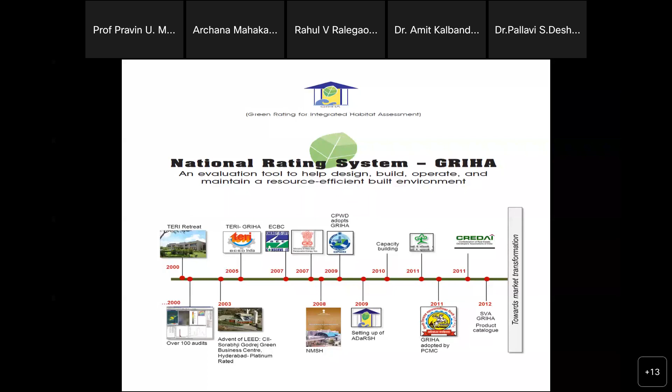So ultimately, every client or every end user wants some kind of ratings or certification for the projects which you file with any of these agencies I mentioned earlier. So when I talk about GRIHA, you have star ratings, like the way you have for air conditioners, refrigeration units, and so on. So you have a multiple star rating system, and as when we write an exam, it is very similar. You have to get the threshold values.

The threshold values are shown in front of you, starting from around 40%, like the passing marks we all understand, from where the journey of fetching the certification starts, right? And then there are ranges: first class, second class, and then distinction, the way we understand, right? So these are the standard guidelines they talk about. And you can see there are various aspects; on the left-hand side, in the section where I'm moving my cursor, these are the criteria, right?

So as environmentalists, I hope you understand the concept of water conservation and waste management, right? However, equivalently, energy also has a direct implication for society. Then you talk about site planning. So these are all various aspects. Some aspects can be in the basket of environmentalists, and a few points may be from a civil engineering perspective. So I will only try to project what is related to environmentalists, right? And then we can take things further.

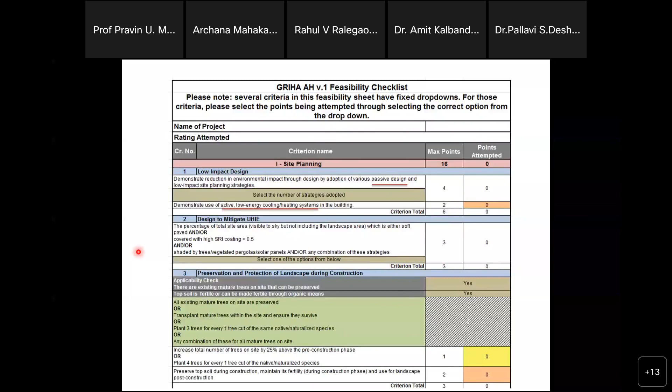It talks about rated capacity of the renewable energy system installed on site conforms to the installation of 1 kilowatt of power per 500 square meter of total built up area as a threshold. Now this itself is a challenge, right? Now there are a lot of aspects, but as a common man, if I want to tell you, this is a concept where fundamentally it is the decentralized approach wherein you meet your resources by your own means, right? So this is the initial investment.

Now again, when you talk about renewable energy, probably we need to understand the baseline: how much energy is required in a building. So as an energy auditor, if we want to work or understand, we need to first evolve with a concept of how much is the total billing, how much energy I exploit to meet all the demands in the premise, say from the perspective of the entire institute, right? Later you can think about how much renewable energy.

So as per the green building norms, if you can meet around 30%, right? Around 30% of your energy, if that can be met using renewable energy, you can get these 6 marks. So this is the baseline. So first you have to get your total demand, and then from total demand you have to see, for 30%, how many solar PV panels I can install. So this is one way.

Or you also have bioenergies. There are different ways to meet the energy demand. It's not only solar, there are other means. So when you talk about renewable, in our individual homes, every individual house cannot have biogas, but yes, you can have a number of solar panels which can help to generate electricity either for lighting or for water heating and so on and so forth. So there are standard designs, and we need to look into this.

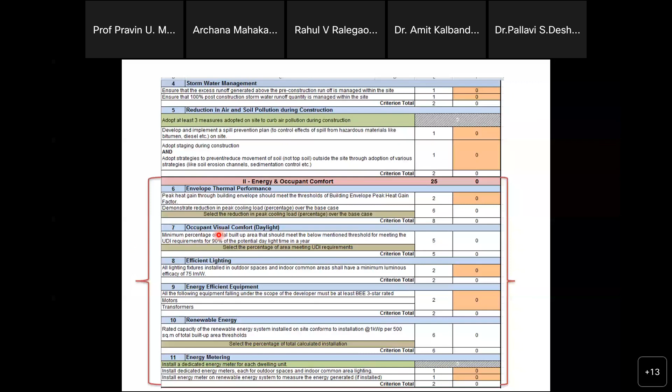There are multiple points. As the time is short, I'll skip this, but these slides I will share with sir, and hopefully he will share them with all the audience, so you can go through them, and you can always put me in the loop if there is anything you are practically trying to get in the project. We will definitely try our best to help you out.

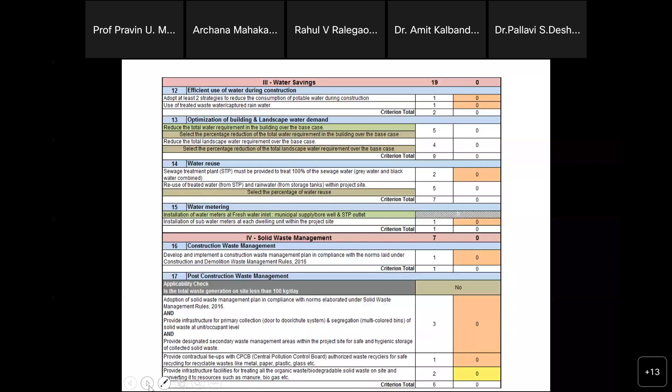So now this is sustainable building material. Probably people must have heard a bit about the various waste we generate. This is something which touches very close to my heart, and I'll be more than happy if anybody has any interest, we can discuss more. But it's typically solid waste management. So we have a huge amount of waste being generated by the communities or the society, and can you use it under the waste to wealth concept, can you generate some kind of resource for the society? So here it is said that almost 40% of your building blocks, right,

they should be from waste. So one kind of waste, most of us must be knowing, is called fly ash, right? But it is not a waste, we call it a byproduct. There is nothing waste on this mother earth, as environmentalists we have to understand. And our job is, can you convert this waste to wealth or byproduct to wealth, right? So fly ash is the byproduct of coal after burning, right? What is left out is only ash, and from that people have started manufacturing fly ash bricks, right? And then why are clay bricks not good?

Somebody may say they are good because they are thermally efficient, but from the environmental perspective, I say they are not good. And now even government has banned. There were certain big articles that none of the red clay bricks should be approved because you exploit top fertile soil, which is not a good sign.

And then for manufacturing it, you need kiln, right? So in kiln, you burn those bricks. So that is also a challenge where you again need energy. So when a product is designed, we call it as embodied energy. How much energy is required to manufacture a product? How much energy is required to transfer the product from manufacturing unit to the site where it is being executed?

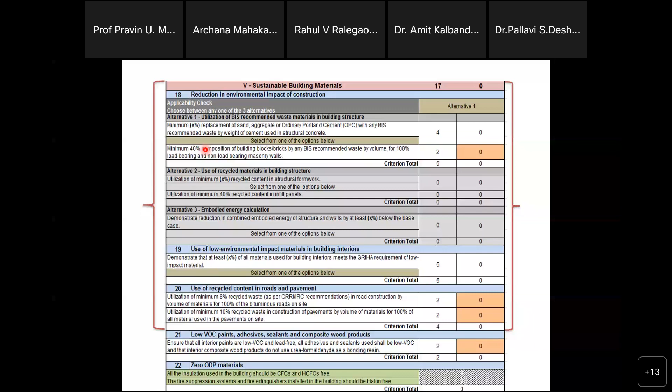As I said, for innovation also, if you feel that there is a novelty, right? Just to give you a practical example, maybe in our childhood, or the guys who are pretty senior will also accept that there was no concept of water filters earlier. Whatever water was coming from the municipal authority, we used to drink. Later on, it has become fashion because all stars, film stars, put something in our mind. Every day on TV or radio you will see advertisements: use Kent RO, somebody says that is the best water.

So what we say is, nobody thinks about how much water you are rejecting. So why green buildings have to be there, why resource conservation has to be there, we need to understand. We need to sensitize the community that whatever we are following is not correct. And when the innovations are there, you need to see that you are not wasting any resource. So we say that sky is the limit for innovation, and as per our need, we keep on modifying our requirements, and then there is improvisation in the technologies, right?

So I can just move further, and what are all the national missions? As the time is short, maybe we can quickly move on.

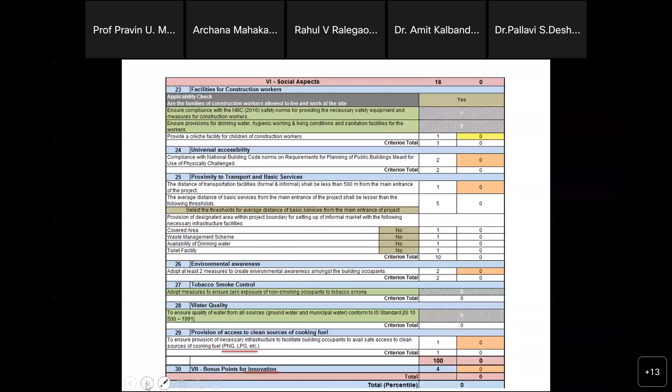For us, this is our bread and butter or the cake. We try to understand what construction materials are for a common man. The majority of people talk in terms of masonry as well as concrete, what we always see in and around us. And for every product there is a binder, we call it cement. And to meet other requirements of the product, there are only two ingredients, fine aggregates or coarse aggregates. Fine aggregates means like sand. Coarse aggregates, you must have seen those black colored aggregates. But can we meet this demand from alternate sources?

So when we started exploring in and around Nagpur, there were huge potential aspects, right? So we talk about utilization of solid waste in our construction industry, from the perspective of industrial waste as well as agricultural waste. And we civil engineers also generate a huge amount of C&D waste. Recently, the last municipal commissioner, when he left Nagpur, said he has initiated this mission for Nagpur, stating that there will be no C&D waste.

And I hope everybody must be reading some newspaper, right? I think today demolition of the flyover in front of the railway station is ongoing. If you get a chance, try to visit and check where that waste is going. It must go to Bhandewadi probably. And then what they are going to do, that also you can check. It is in no way segregated.

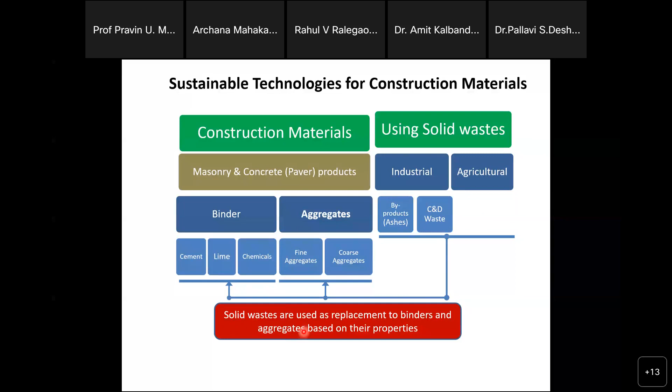And you can see these are the fact sheets from the government perspective, what the government of India has given as inputs. Initially, the majority of our products were all focusing on agricultural waste. We generate a huge amount of waste. Hopefully people are aware that whatever agricultural residue we have, we convert into biobriquettes. So they are the alternate fuels which are being used. And nowadays most of the medium scale and small scale industries are converting their fueling pattern from coal to agro-based products, right? So this is one part.

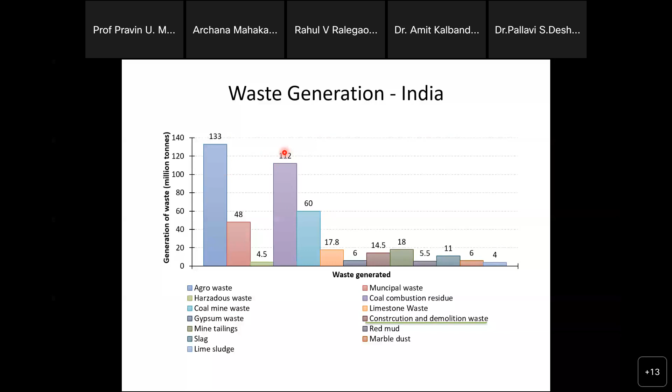Then when you talk about C&D waste, that is also very high in our society. This is a national scenario; I'm not talking about the scenario of Nagpur only. So what we primarily do, and I'm not going to use any technical terms, right? However, I just wish to let you know that we need to understand the feasibility of those kinds of products we have. For that, standard tests are there. We need to characterize those particular products. We need to understand the surface morphology. We need to understand what that product is all about. Does it have heavy metals?

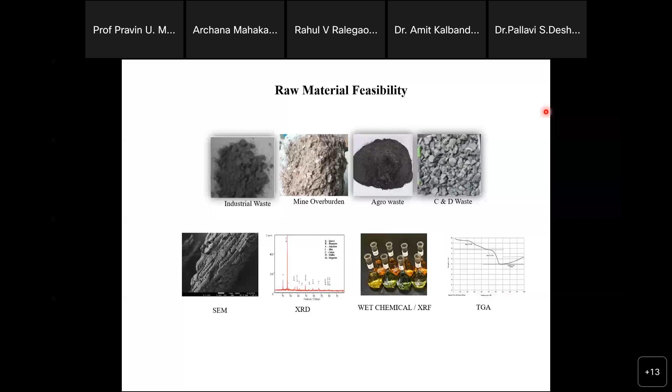So looking at that, how can we facilitate, how can we build this ecosystem of going more into greener constructions, right? When we began 10 years back, there were hardly one or two buildings in Nagpur. You see so much construction activity happening around us. There are only a few structures which are green certified or green rated, in fact. But there are a lot of agencies whom we can sensitize, get associated with and put forward our concerns, and we are by and large connected with most of them, wherein we give our inputs, we try to learn from them or we give them solutions in terms of techno-social challenges we have in society

as far as meeting the green buildings are concerned, wherein the primary focus is conserving resources, that is, the right construction material, then reducing water usage throughout the life cycle of the structure, and then energy. So how can we reduce the load on conventional energy? It's not only putting up solar panels, but how beautifully we design the structure so that the demand itself goes down.

So we could see some C&D waste, and this was one of the examples. I could show you point number 4, which is again available in the public domain. When I talk about Nagpur, the waste generation recorded or given by the government is 1.12 tonnes per day. So it's not a small amount. Now you can see most of the places where redevelopment is happening, where that waste is going; people talk about backfilling, right? However, it has huge potential to be sold back for construction materials, where you can save your soil and natural resources.

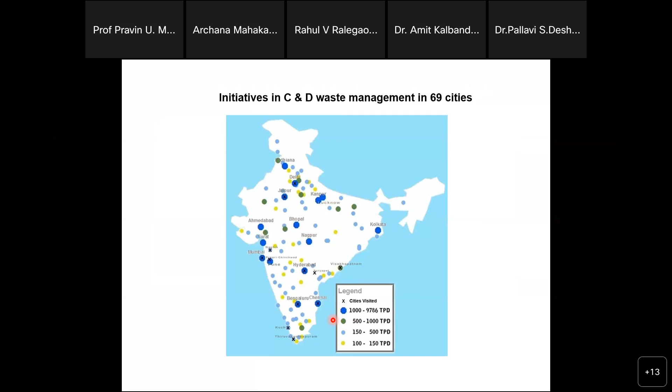So this is how the NMC talks about dumping the waste in the Bhandewadi area, and then again we don't know whether it is being segregated or not. Yes, but I'm talking about standards, right? As a civil engineer or as a material manufacturer, my job is to make sure that these products can go into real life projects. So we say that utilization of waste up to 25% in concrete is permissible, and that is why we started doing this kind of business, manufacturing the products.

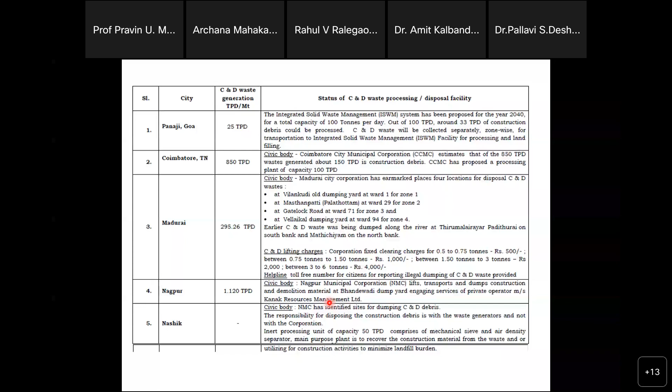And when I am saving 25% of the commercially available product, I also make an end product which is cost effective. That is also one important part, because in India, only things which are cheaper can go into society. Otherwise, it's going to be challenging. There are standard ways, standard methods of meeting this particular demand, and then you have defined ways of doing this business.

I haven't seen any particular operating unit which does this kind of processing, probably not in Nagpur, but if anybody has potential, you can do this business, especially since these kinds of mobile equipment are now available in the market. Even in a place like Delhi, people are doing this business of segregating various materials and selling them back to construction manufacturers.

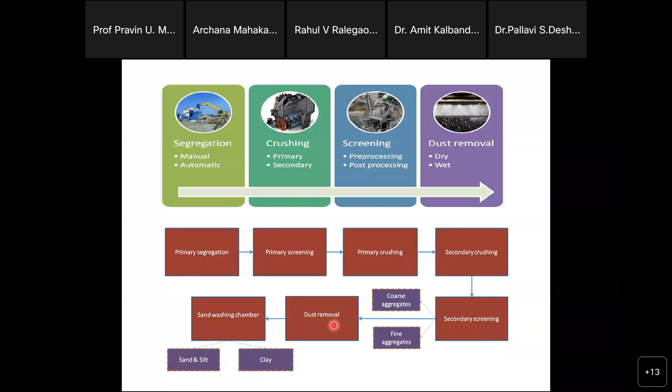If any of you has keen interest, you can visit my lab, maybe on vacation or any holiday, and I can take you. For me, my lab was always the roof, where we have demonstrated all our technologies in small scale models, so that anyone can feel what these products are all about. They're almost 8 to 10 years old now, and all structures are standing very safely and robustly.

Some of the products we have used - I'll just highlight, because we are dealing more with the environment - we have used recycled paper mill waste, C&D waste, sugarcane bagasse ash, biobriquettes, and co-fired bagasse ash. These are some of the products where we have tried using them in these materials.

A lot of products are available in scientific documents and literature. You can refer to them and study a bit further, whether for marketing or learning purposes, anything can help.

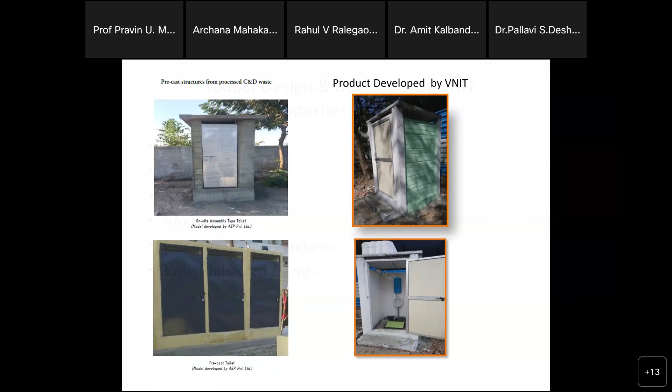So what we are trying to do, as I said, is usage or design of the product - we want to have a sustainable product. When it comes to sustainability, for me, we need to understand that socially something should be acceptable, economically it should be viable, and third, it should not create any adverse impact on the environment. If these three points are met, that becomes a sustainable product for me.

We wanted to design a lightweight product. Probably recently you must have seen that during an earthquake, most people die because a heavy object falls on someone's head, right? So these are some examples.

So having lightweight products has multiple benefits - also you save a lot of steel, since manufacturing steel is a huge, energy intensive process.

We wanted to hit the bottom line - as we are working for socially deprived communities in urban slums, it should be affordable. And then modular, meaning it can be a small product or a bigger product - as per the client's requirement, we can manufacture accordingly.

Any product we design needs to have compliance with standards. For any engineering product, there are BIS - Bureau of Indian Standards - guidelines defined for each and every point. The way you must have done experiments in class 12th for water, you evaluate a number of parameters and check whether they are within permissible limits. If they are within permissible limits, we call it potable water, or suitable for any other use. That is the meaning of why we need to comply with standards.

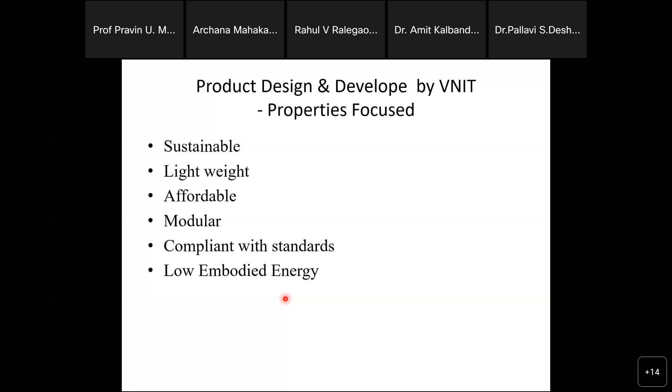So for which I am always keen, I am always ready. Most of the products what we make, recently we have come up with our own toilet unit, security guard rooms, which we have given to some of the industries for testing purposes.

This is a G+1 house, which we have done in the Pandrabudi slum region, in fact, which is being monitored. And you can see the potential, right? All these waste materials - recycled paper mill waste, sugarcane bagasse ash, C&D waste, biobriquettes, and so on, granulated blast furnace slag, and so on and so forth.

We could evaluate, or we could check the feasibility, and you see the wonders. Almost in my concrete, up to 100%, I can go for waste utilization for meeting one of the ingredients. So there's a lot of potential of use of all these waste.

Only we need to, as per NEP, as sir has rightly said, now NEP talks about cross boundary. There is no boundary of learning. There is nothing like civil engineering or environmental science. If we blend together, probably something good can happen for the society. That is what we believe, and we are already working on the similar pattern since ages.

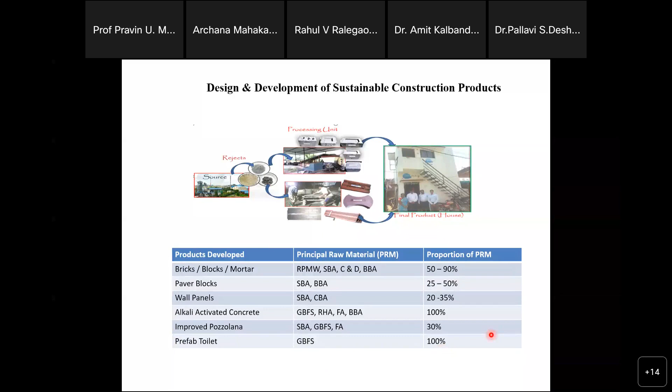So these are the live products what we have in our lab. You can see them. They are all cost effective in the market. Whatever bricks you get, the cost is around 5 to 6 rupees.

So we have our own plant in campus. So this cost goes somewhere around 2 to 3 rupees. And the energy is also less.

You can see this is your burnt clay brick. BC stands for burnt clay brick. So embodied energy is too high, and fly ash bricks, it also has 2.73. These values we have estimated.

However, other values we have done for our own products. What we believe is the product performance evaluation. So we do a lot of laboratory testing. We do a lot of on-site testing, and also we do computational testing for the products.

Here you can see now with the base case, the peak cooling load was 100. However, we could reach, or we could save almost 20% of your cooling demand into the structures using appropriate materials when we have n number of product libraries.

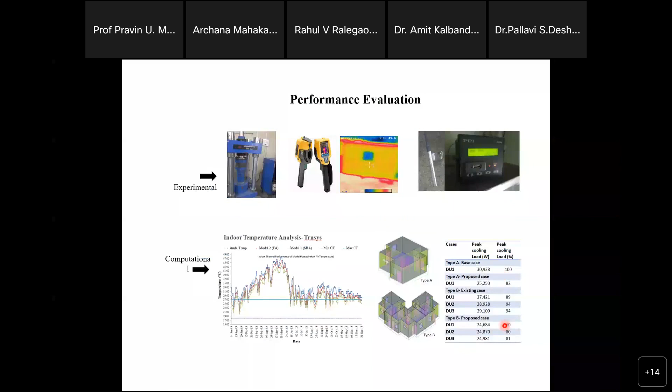Yeah, so this is the software. I'm not going to talk a lot. Yeah, so just wanted to show one comparison.

So more or less cost wise, however, the thermal part as far as a place like Nagpur is concerned, we could come up that almost thermal conductivity has gone down. So thermal conductivity is reciprocal to thermal resistivity. So our products are more thermally resistant. So, or you can say efficient.

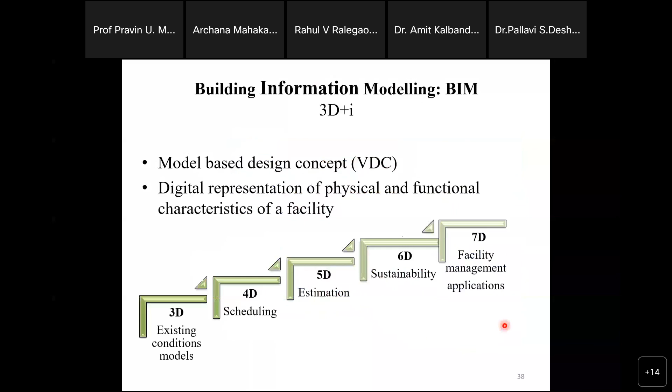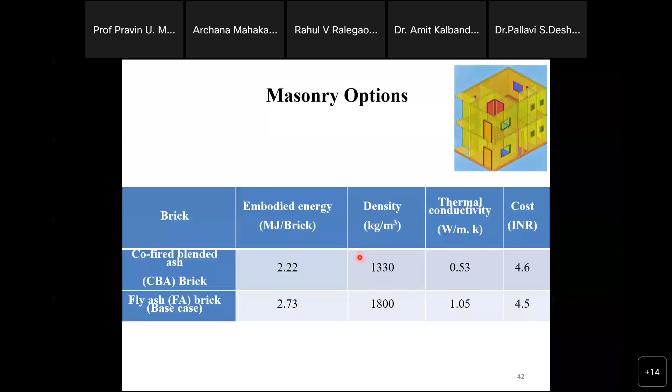So it's a greener revolution for these kind of products. When I'm using these efficient products, which are thermally efficient, I can reduce the cooling demand as well. And we could come up with the appropriate fabric of the structure. That was more important for us.

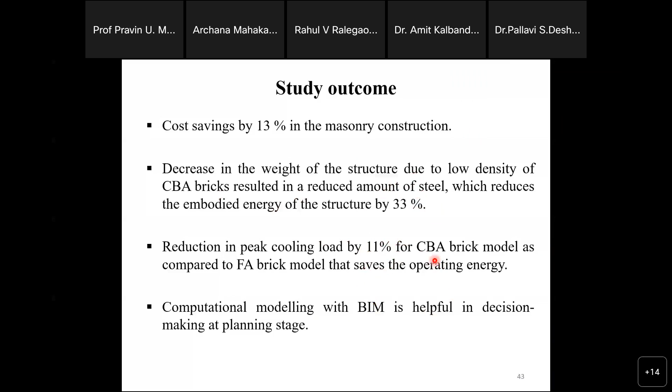Most of these products are being audited, not only nationally, but also we comply with international experts who come and check and certify our products. So this was one mission.

As I said, although you are an academician, see to it - we have holidays, we have breaks - start moving into the masses and try to understand, try to solve their problems.

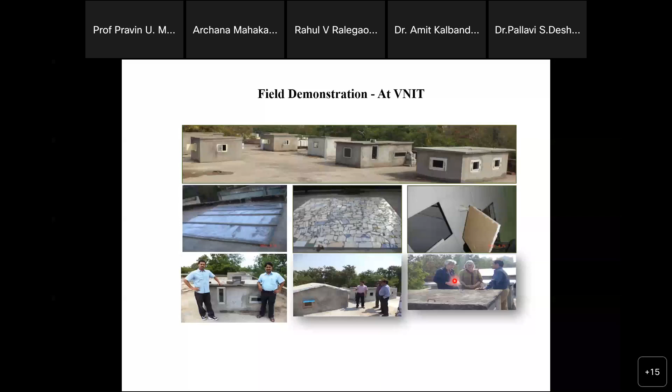This is one of the products what we designed 5 to 6 years back, and we gave a shelter to one of the socially deprived families just to check what is the impact. Upscaling the concept from the lab manufacturing units, they have accepted our product and they allowed us to go for mass scaling of these kind of products in their labs.

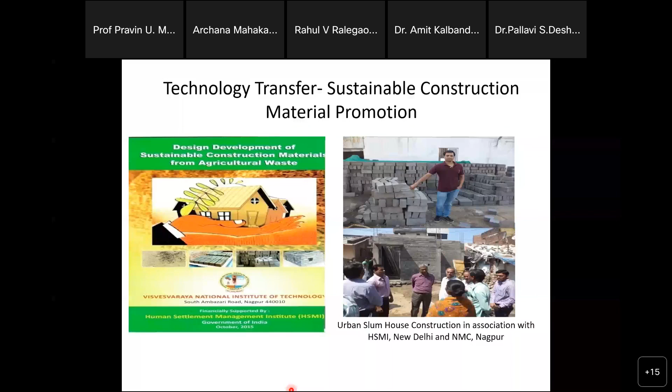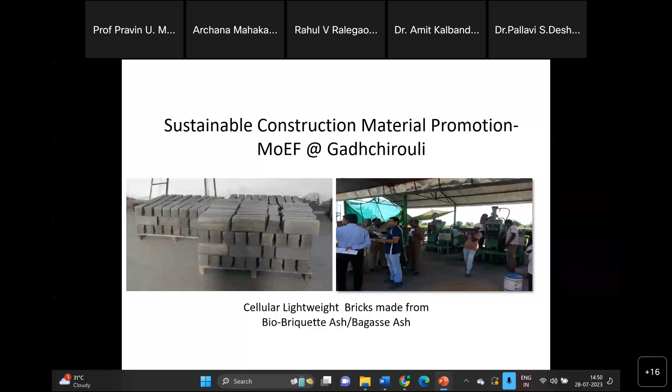So this is a full scale model, and it shows the reduction in the weight of the structure, saving in cost, and also temperature control where energy is directly involved, which talks about carbon footprint accounting.

We were one of the teams for smart city, whatever we have. I don't want to go into these parts. As I said, time is very short. It is exactly 2:51 on my watch.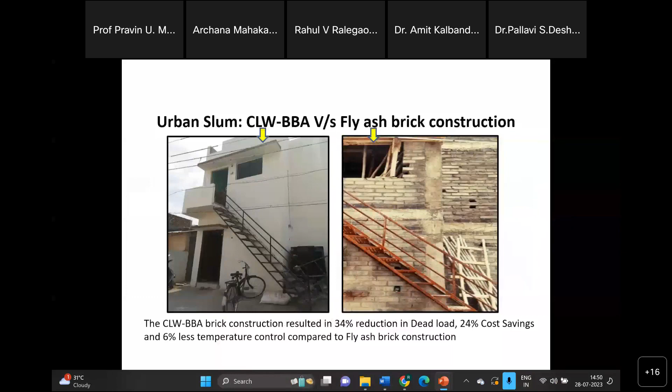We are going ahead a lot with novel technologies, where we are developing prefabricated units and jointless construction and so on. It is more into engineering. As time is short, I won't reveal much, but that product is under design and development stage. Maybe down the line, after two to three years, we hope to be in a position to transfer the technology from our lab to national mission projects.

I don't know how much time we have, but as time is less, I can stop here. I have enough material because I teach this subject for 40 hours, and given a chance, if I have to complete everything in one hour, it's next to impossible. But I'll be more than happy if anybody wants to ask anything, I can share. Or maybe for water, let me see something. This is all more from materials and energy savings.

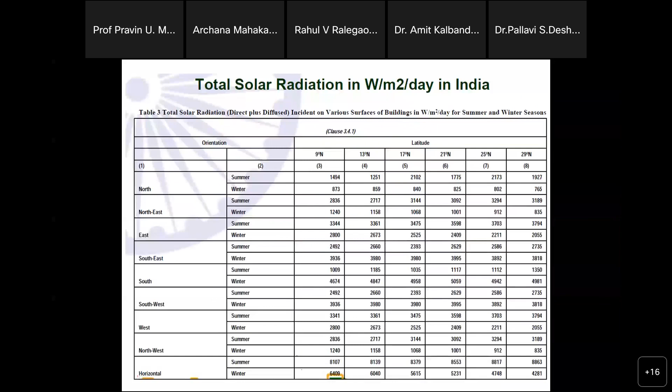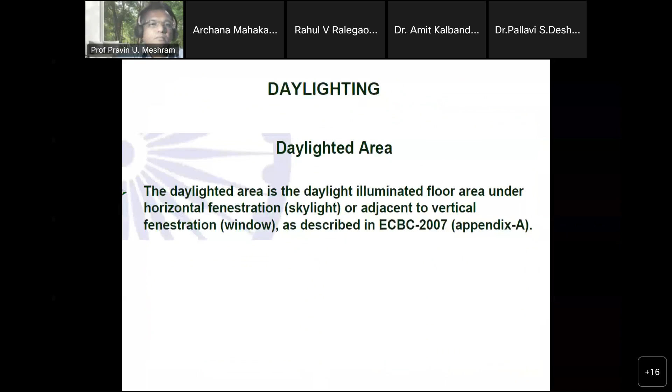For water, let me check quickly if I have a few slides to show you, because these are all energy related aspects. If you get a chance, probably as an environmentalist, either student, teacher, or researcher — Honorable President Pratibha Tai Patil initiated one mission called Roshni. So with this title, Roshni project, if you can identify something, you will get to know what kind of innovations as far as green buildings were done at the President's house. So this is a case from the President's house. As time is less and there are enough stories to tell, a lot of software tool programs are available in the public domain which can be used and made available.

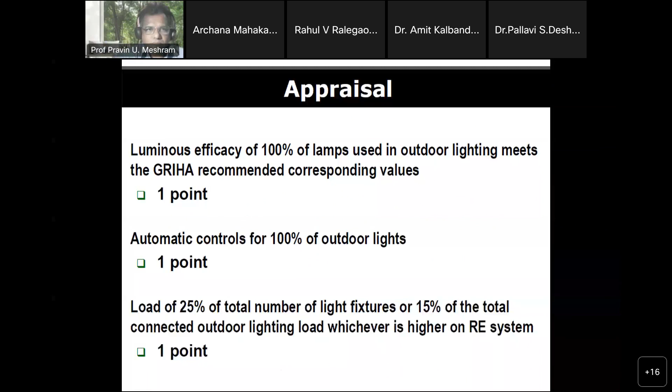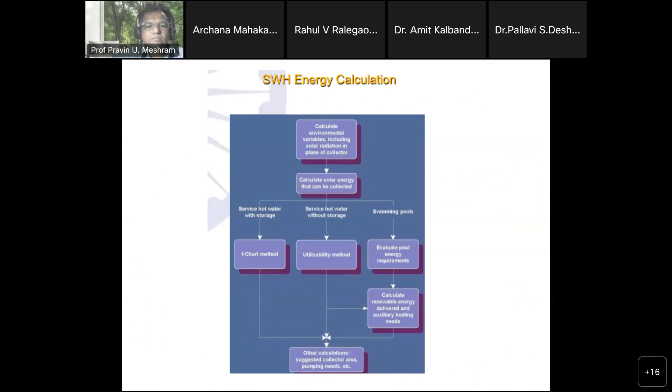This is all for solar, how to go about solar designs. And then for water, let me show you something. How do we go for calculations and estimations? It's all like Excel based work, more from renewable energy. I have more into energy, like energy and materials — you can see energy and materials are more.

These are all the questions which I can skip, which we used to discuss in sessions with most of the technical people. This is slide 54. I have another six minutes to go, but rather than me speaking, I'll be more than happy to interact and answer some questions. Thank you. Over to you, organizers.

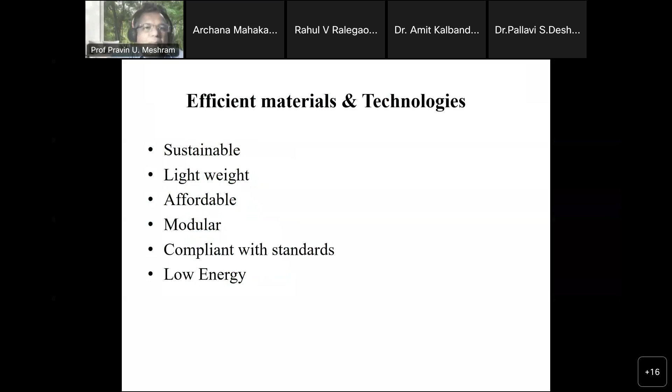Hello, sir. Dr. Rahul sir, I'm having one question. Apart from environmental benefits, by constructing all these green buildings, is there any social benefit, or what we call economic benefits? Is there any economic benefit?

Yes. So as I have shown you, some kinds of products are sustainable. So obviously, when I am partially substituting the ingredients of a product by, say, 50% waste, the product itself is cost effective. That is one part. And normally nowadays, what we do is we go for life cycle assessment.

So when somebody says I have installed a solar panel, its payback period is 7 to 8 years. So one has to wait, but your building is for 50 years. So one has to understand that economics is for sure there. Sometimes the initial investment is high, but when you do the life cycle assessment for any particular product or technology, it becomes efficient from the cost as well as environmental perspective.

Yeah, okay, thank you, sir. Hope I could answer. Yeah. Now I would like to request all the rest of the participants, please go on asking. Good afternoon, sir. I have one question, sir.

My doctoral thesis is on affordable housing initiatives for the urban poor in Nagpur, and I'm about to submit my thesis. My question is, do we have sustainable practices for affordable housing for the urban poor in Nagpur in terms of energy efficiency?